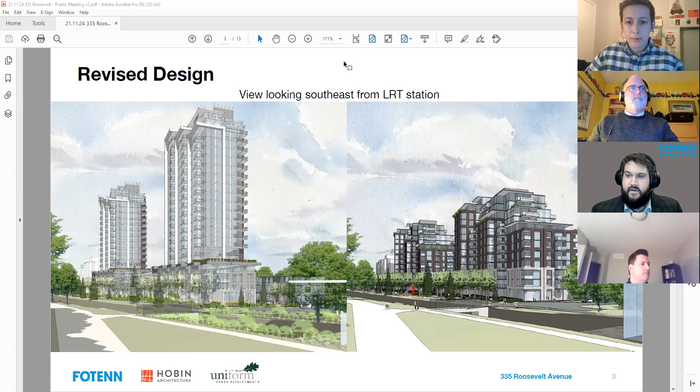So this is a view looking southeast from the LRT station that shows the difference between the original proposal on the left and the new proposal on the right. The former proposal had a building height of 21 and 18 stories. The revised proposal is two equally heighted buildings of 12 and 12 stories.

Hobin Architecture will go over this in more detail, but we previously employed more of a podium tower type design, where you had a strong ground oriented podium of about 3 to 4 stories followed by a tower above that, reaching 18 and 21 stories. The revised design is more akin to what we would call a bar building, which is a shorter, squatter type building, significantly less tall than the previous proposal.

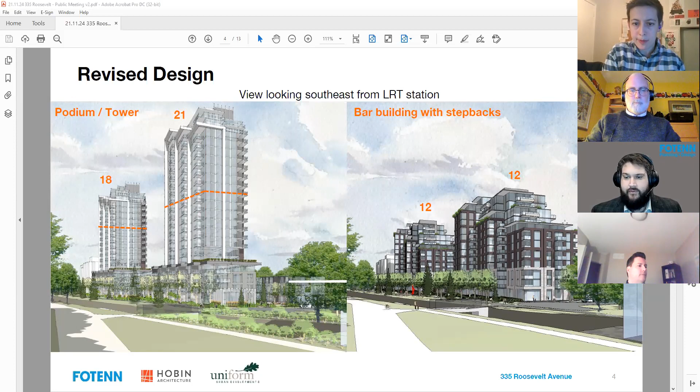We include further step backs at the 7th, 8th, 9th, and 10th stories in order to create a cascading effect with respect to the upper stories. From a side profile elevation perspective, you can see a significant reduction in building height from the previous taller building, which was 21 stories, to now two very similar, though not exactly identical, buildings of 12 stories.

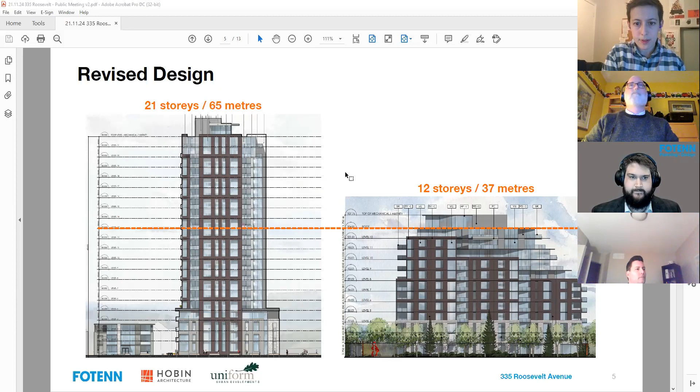As part of the redesign of the building, there came a change to certain key statistics as part of the application: an increase in the footprint of about 12%, as a reduction of the overall building height, as I mentioned, from a podium tower design to more of a bar building design. The buildings get a little bit squatter, and it's an increase of about 12%. That also means an increase in lot coverage of about 5%.

Walking quickly through some of the perspectives. Once again, this is an aerial view looking northwest across the site. Former proposal on the left, new proposal on the right. You'll also notice a change to some of the ground oriented buildings, along Wilmont and Winston, and on the back on Roosevelt as well.

We have these, what we're calling, inspired by the 613 flats model — essentially 3-story, 6-unit, low-rise residential developments. One of those buildings was removed as part of the proposed redesign, but 3 of the buildings will remain.

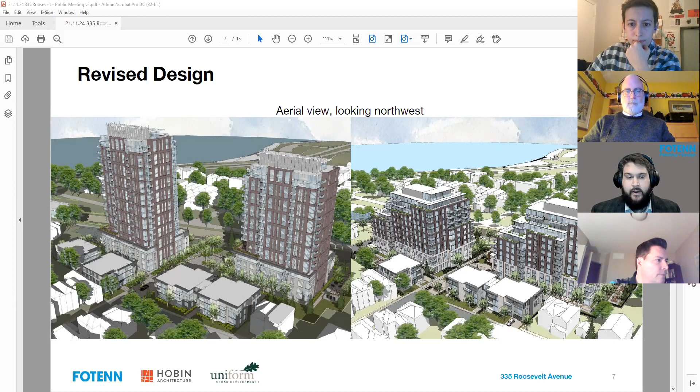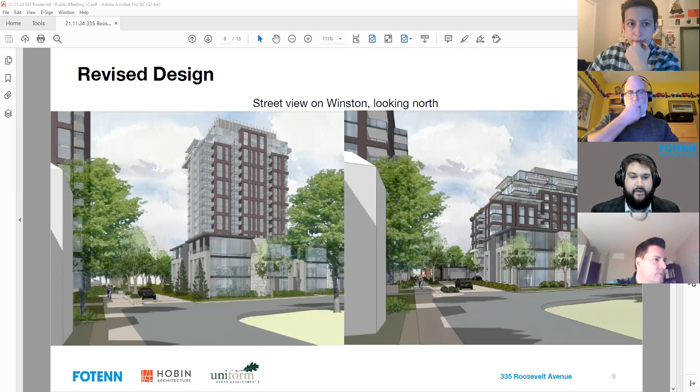This is another perspective on Winston, looking north, showing the aforementioned low-rise buildings that were discussed, as well as the revised eastern building. This is another perspective showing the aerial view of the mid-block connection, providing access through the site connections to the MUP as well as the residential community to the south.

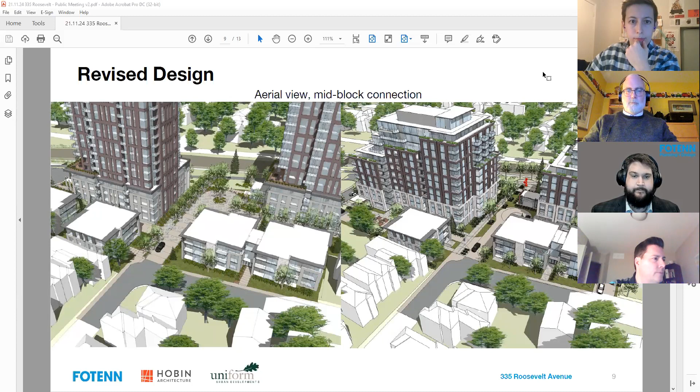To speak to the purpose of the applications, as a recap: the official plan amendment is to amend Schedule C2 of the secondary plan, which permits a maximum building height of 8 stories, whereas the subject proposal is for 12 stories. Subsequently, the zoning bylaw amendment seeks to change the zoning on the site from R3 and R5B to a straight R5B zone with a site-specific exception.

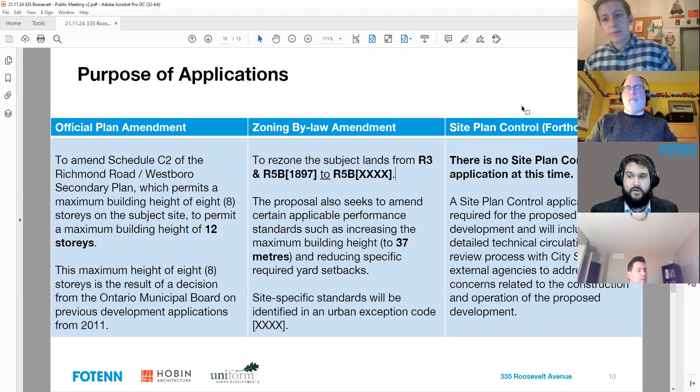This would essentially increase the maximum building height as proposed to 37 meters, corresponding with the 12-story proposed building height. There are other site-specific standards that will be identified through an urban exception code, such as certain reduced yard setbacks. The third application in line would be a site plan control application. There is no existing site plan control application forthcoming at this time, but there will be a future application should this set of applications proceed and receive approval.

To speak briefly with respect to the policy context, a lot of the comments we received were about what has changed since the previous application, which was submitted in 2011 and eventually settled by the Ontario Municipal Board. So we have this slide that shows the previous application would have been submitted under the 2005 PPS context, and it's a little bit different.

These sections and policies do change and get updated every 5 years. But you can see there's been a change in the frequency of key terms such as transit intensification. You're seeing certain policies updated to promote more intensification next to transit stations. This is just an overall summary of that change from 2005 to 2014 to the newest PPS from 2020, which is the PPS that applies to this prospective development.

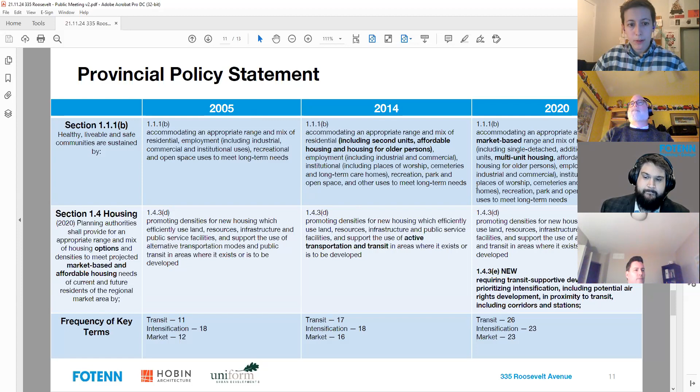With respect to the official plan, this application was submitted in 2020 under the current official plan, but we wanted to walk through briefly some of the changes as part of the 2021 council approved document from October. Overall, we're seeing a direction towards more intensification and a diversity of housing options in neighborhoods and other communities.

There are also policies specifically under section 6.3.1 that speak to allowing higher densities and permitted heights adjacent to rapid transit stations. Similar to the current context where we argue that the proposal supports transit supportive and transit oriented development adjacent to Kitchissippi Transit Station, under the new official plan it's a similar policy context, but it actually provides a bit of a different direction.

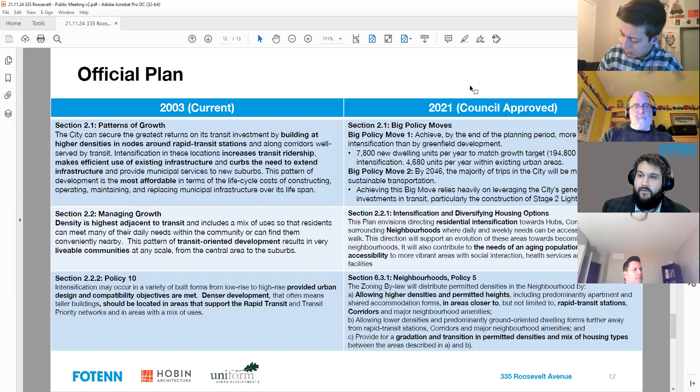This is a council approved document going to the ministry, but we did get some questions about the state of this application with respect to the current and council approved versions of the official plan, so we wanted to provide a brief overview in that respect.

I'm now going to turn it over to Rael Labelle from Hobin Architecture, who is going to provide us with a brief design presentation as well as a short video.

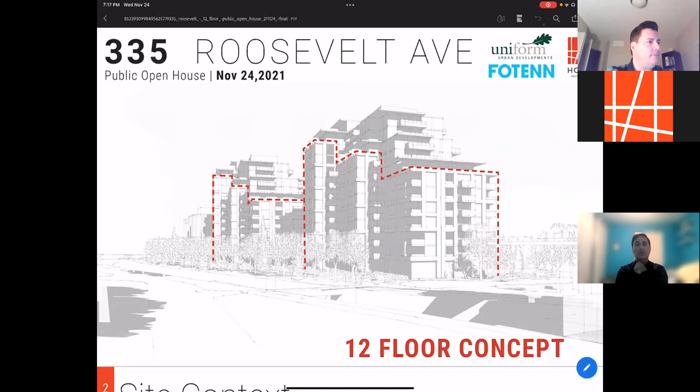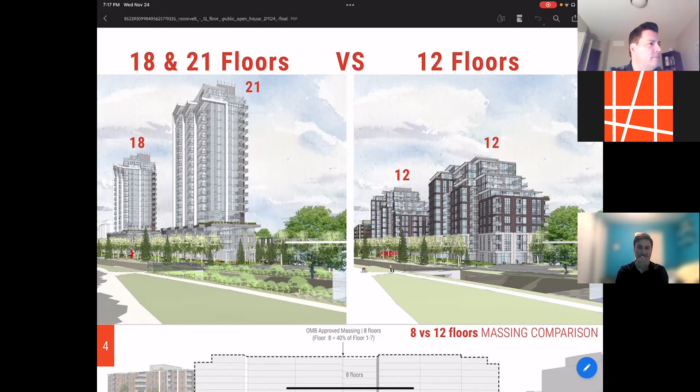As Jacob mentioned before, we are moving from an 18 and 21 story building to a 12-story building that has significant architectural language allowing it to transition down to the lower neighborhood, all the while keeping some reference to a benchmark framework that was established by the OMB.

The next slide looks at an OMB approved massing of 8 floors at the very top, that spans essentially from the westernmost setback to the easternmost setback requirements of the site.

Our proposed scheme looks at taking away the center portion of the site, extending Willmont through the site, as well as shortening the overall footprints of these buildings so that we have a gap between the existing 7-story building to the east, as well as significant building step backs that step the building height down from its uppermost 12-story towards the public realm along the gap we're creating along Willmont, as well as the existing street on Roosevelt to the west.

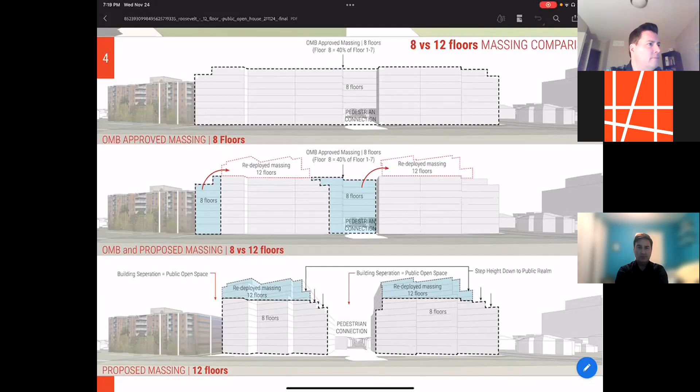The idea is to redeploy that massing we're removing from the center and eastern portion of the site, and position it over on top with some architectural detailing that allows this mass to recede as you extend up. This is intended to provide access to the sky plane, as well as bringing porosity to the site for surrounding neighborhoods.

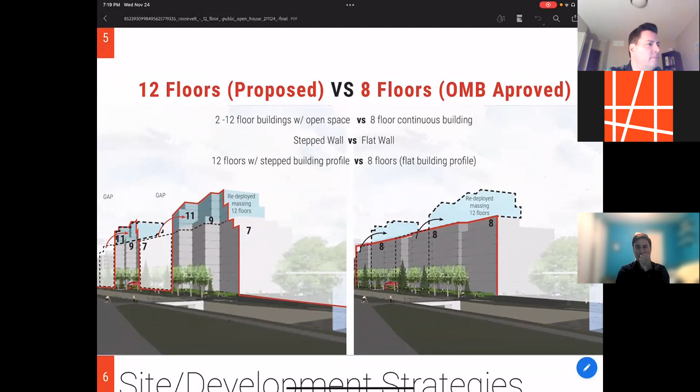This slide looks at that stepping. On the right, there's the bar building that is essentially 8 stories, a continuous bar with a pass-through that would be 2 floors along Willmont to allow pedestrians to connect through, versus what we're proposing on the left, which looks at creating stepping starting at 7 floors, 9 floors, and 11 floors, all the way towards the gap at the center of the site, and then restarting again at 7, 9, and 11.

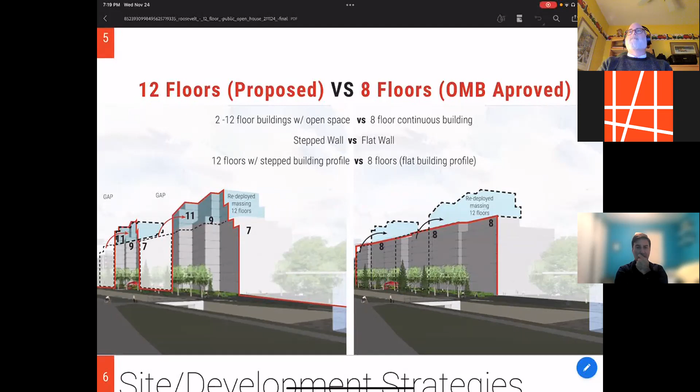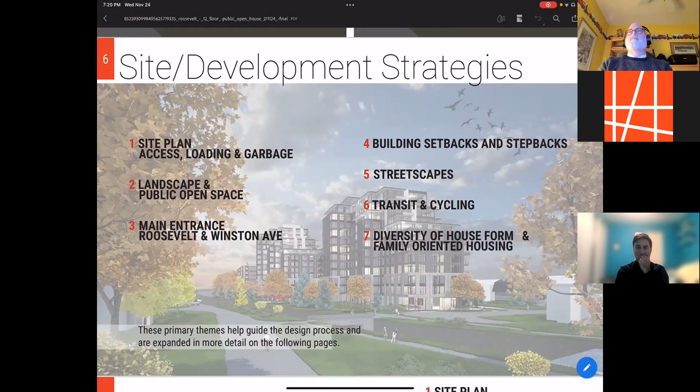So really preserving or reducing as much of the mass of the building as possible and creating openness surrounding the site. Some of the site development strategies, I'm going to look at 7 points, and I'll go through these in detail, and we can revisit them in the question period. Essentially these help to shape the design of the entire site.

I mentioned before, we've got now two 12-story buildings, the east and west, and everything to the south of the development is a low-rise wood frame component that helps to transition the development to the existing low-rise neighborhood.

The ground plane is predominantly occupied by 70% open space consisting of landscape. This creates a really interesting interface between the existing neighborhood and the development. What we've done is pull the vehicles off the street into the site for loading, garbage pickup, and move in, move out, so these larger vehicles are not seen from the residential streets. Our residential lobbies are strategically located, one on Roosevelt and the other as part of the extension of Winston.

This allows the buildings to have very prominent entrance features, as well as you can see the blue pedestrian lines cutting through the site. This entire development is predominantly pedestrian oriented versus vehicular oriented.

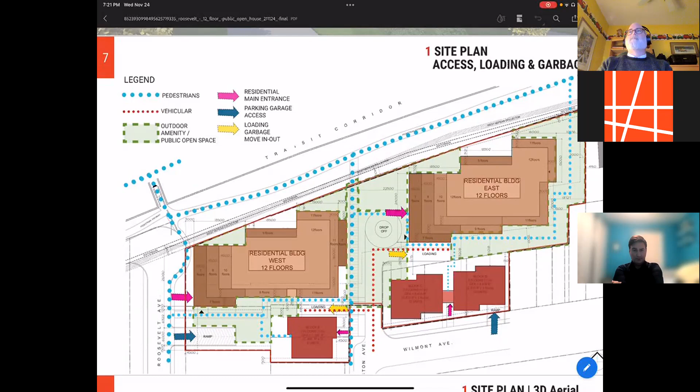There are parking ramps that take you down on Roosevelt at the bottom left, taking the car off the street to underground parking. There's another parking ramp on Wilmont which tucks underneath one of the low-rise buildings, again removing cars from the street. This project is going to encourage visitor parking with a large capacity, so there are fewer cars within the existing neighborhood, pulling all of the cars from surface to below grade.

This is another 3D animated slide that describes what I've just talked about, with emphasis on the entrances to the residential buildings, which are highlighted in pink.

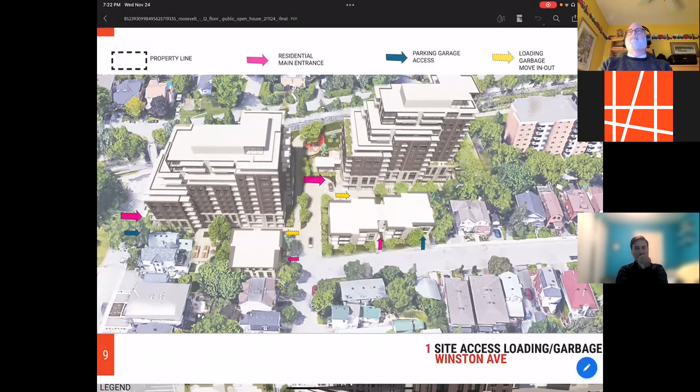Next slide looks at that connection on Winston through the site, pedestrian focused, with a public art feature at the very end at the crossroads between the MUP and that pedestrian connection.

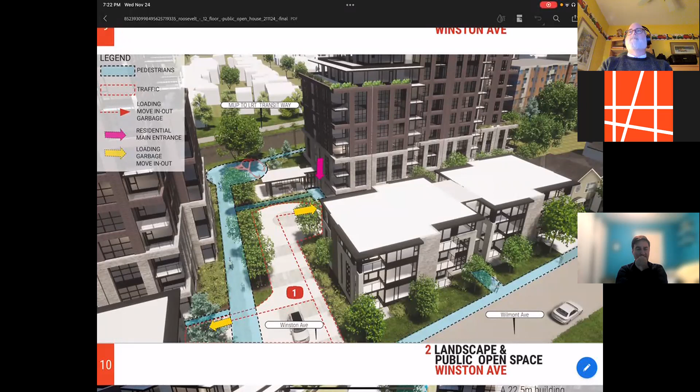You can see in the yellow arrows where we've identified the loading access points, again removing the trucks from the street. Our residential access point for the east building is located at the very heart of the site, promoting that diversity of public and private connection.

The landscape public open space, looking at it from the north, extends through the site. At the bottom of the page, you can see the connection of the crossroads between the MUP and Winston Avenue, the pedestrian link cutting through there. We've animated this space with a small, low-rise residential lobby which projects out and starts to shape your pedestrian experience as you come through, but predominantly dominated by landscape and trees.

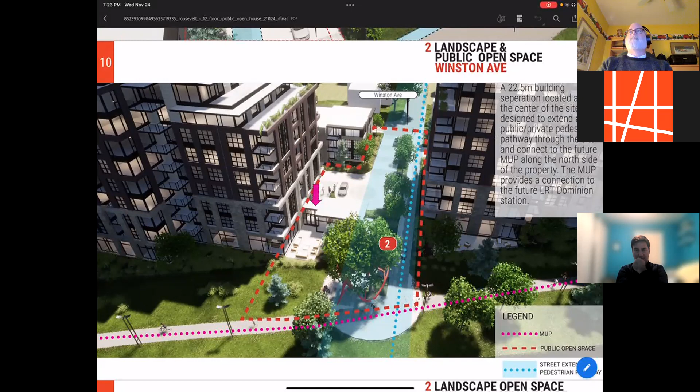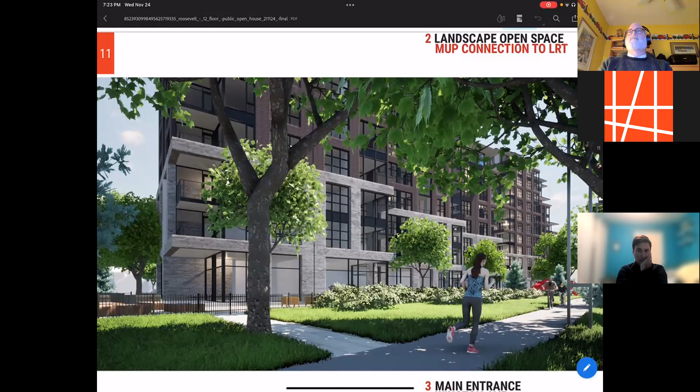Which brings me to the next slide, landscape open space. This is an image taken from the northern part of the site along the MUP. You can see the articulation of the building, how it's broken down in terms of materiality, setting up a 3-story datum line that creates your foreground experience as a pedestrian. That entire ground plane is animated with amenity spaces, active throughout the year.

Main entrance on Winston. This is a view looking north on Winston, and you can see at the very end the public art feature, the street trees extending through the site, as well as a small low-rise pop-up residential lobby that punches through.

What's really important and valuable here is to start to see how the red brick stepping of the building starts to rise up, and also the sky plane, which is completely visible from the residential neighborhood to the south.

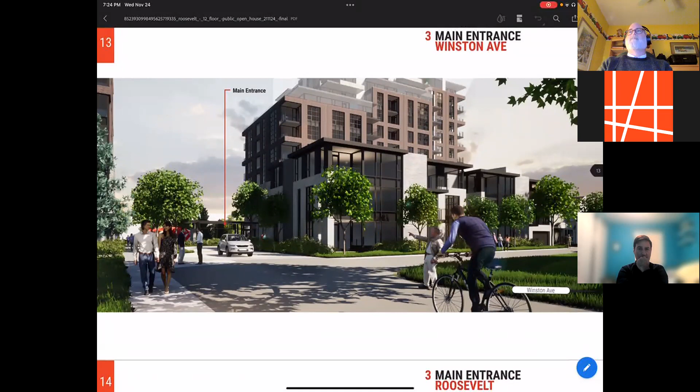This is another view as you get a little closer towards Willmont and Winston. You can see how the low-rise residential component along Willmont starts to extend and relate to the existing residential neighborhood to the east, while creating a significant step back of the buildings to the north. You can see the main entrance component, which still has a presence through the gap of the site.

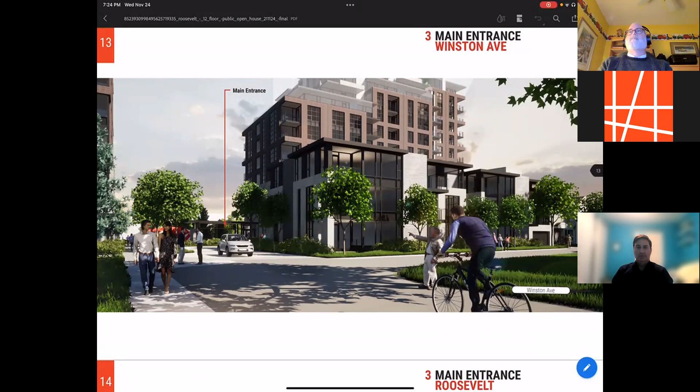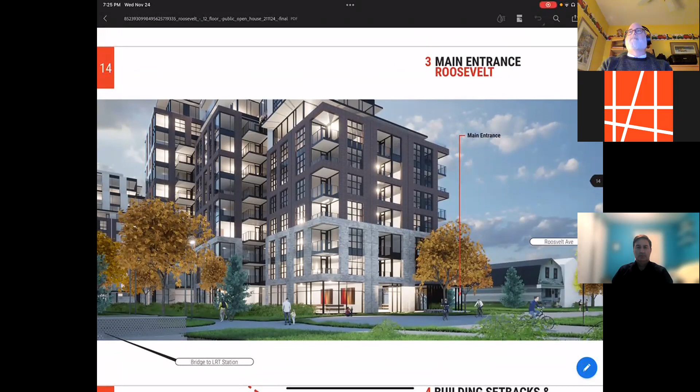You can start to see the significant step, the setback between the building and the neighboring residential property to the south. This is another view a little further on Roosevelt, standing in front of this empty lot where we removed the low-rise component.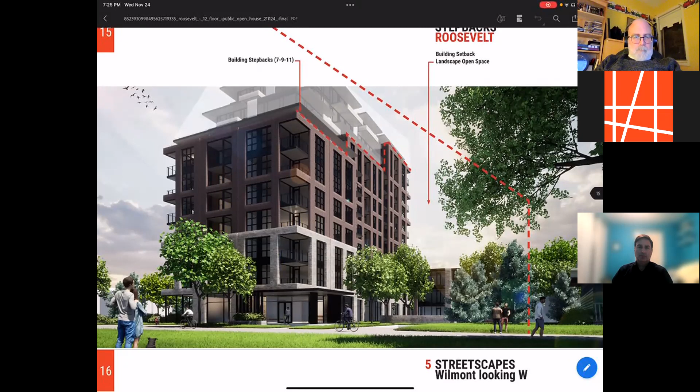We have a parking ramp access here, as well as some outdoor amenity space. Again, a significant setback between the existing residential neighborhood and the building, all the while emphasizing the breakdown of the mass of the high-rise rising up from 7, 9, and 11 floors with a significant building step back at the very top.

This is a view down on Wilmont, looking west in this case, standing in front of what will be the transition piece between the existing residential neighborhood and the new proposed low-rise buildings. Again, an extension of building height throughout the street allows that to be the shaper of this development, with the high-rise buildings falling away in the background.

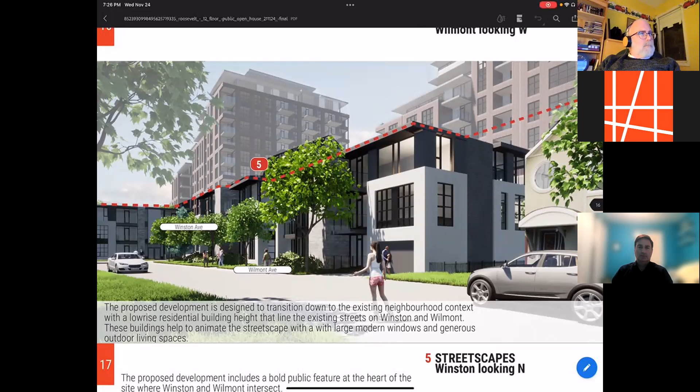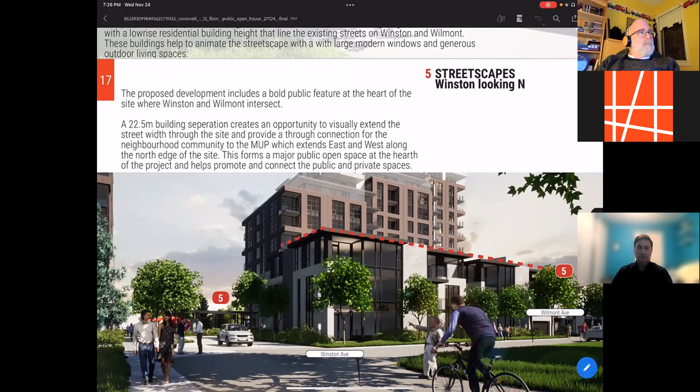This is another slide that speaks to streetscape on Winston, looking north. This is again about the diversity of housing type, creating a strong datum line along those residential streets that relates to the height and scale of that neighborhood.

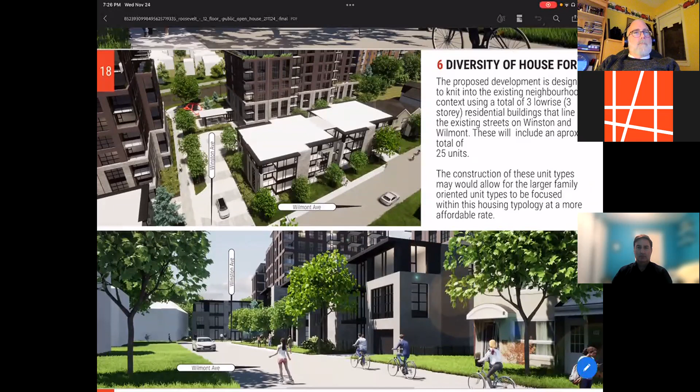The diversity of housing form in this case is intended to attract larger family-oriented unit types to be focused within this housing typology, and perhaps providing a more affordable rate because of its wood frame construction type.

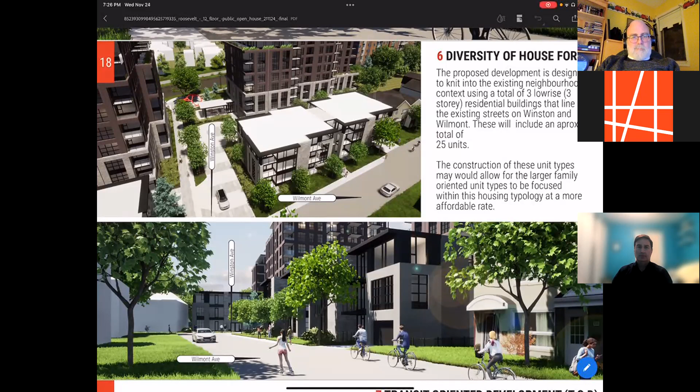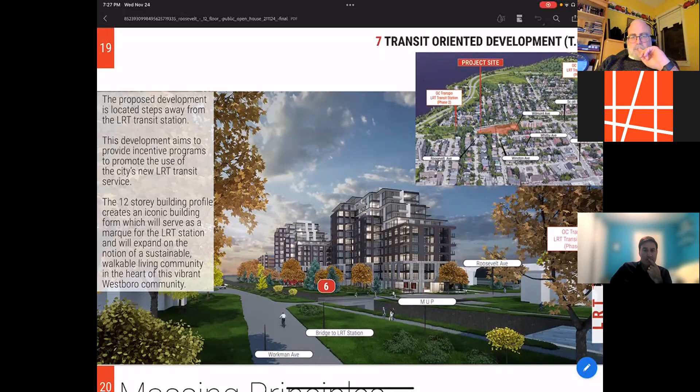And again, this is the transit-oriented development view. So to the right, we have the LRT, the new Dominion station location, and proximity to the bridge, the pedestrian bridge that will link and connect you to the MUP that will span east-west along the front northern part of this development.

So just to go into some of the massing principles and how we've looked at articulating the architecture, making sure that we are responding to this being a very delicate approach to design as it relates to building transition, height, and transition for its existing residential neighborhood. So I'll go over these six points in detail.

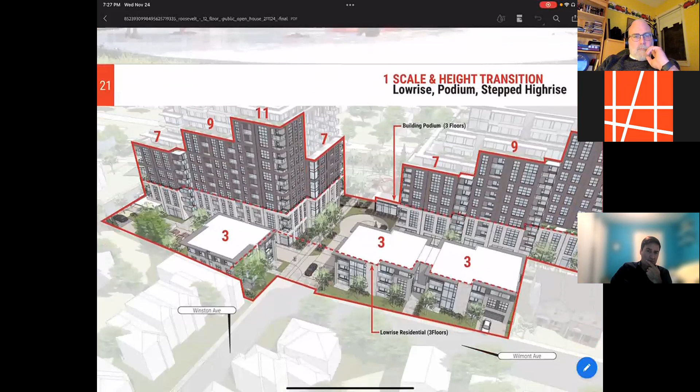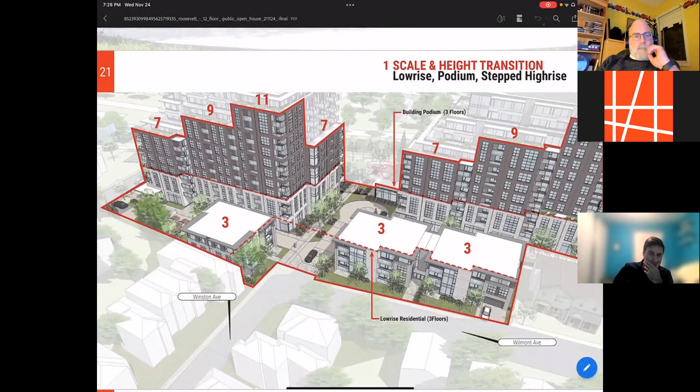This basically is intended to show a diagrammatic breakdown of the mass. This looks at scale and height transition with regards to the low-rise podium that sets up Wilmont and Winston, and creates that building step back for the high-rise component set in behind to the north, also articulated with a 3-story podium edge, as well as a red brick or darker brick mass that steps up from the public realm with 7 stories, and again 9 and 11, with significant building step back and roof terraces that allow this building to really help break down the mass.

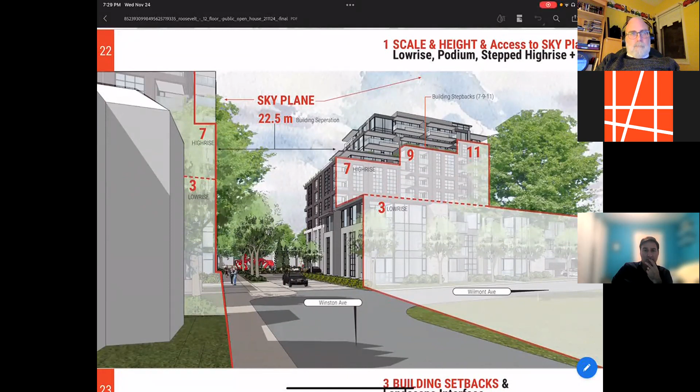This is a slide that speaks to the building setbacks and some of the landscape interfaces, especially when we get into the neighborhood just north of Wilmont. The building footprint itself steps away from the rear lot lines in order to achieve a 10-meter building setback for the high-rise component behind the existing residential buildings.

We were originally in meeting with Steve Gauthier and planning staff, and we have compromised from an old building step back, which was at level 7, bottom right-hand corner, to a new building step back at level 4, which achieves that 10-meter building step back for the high-rise component.

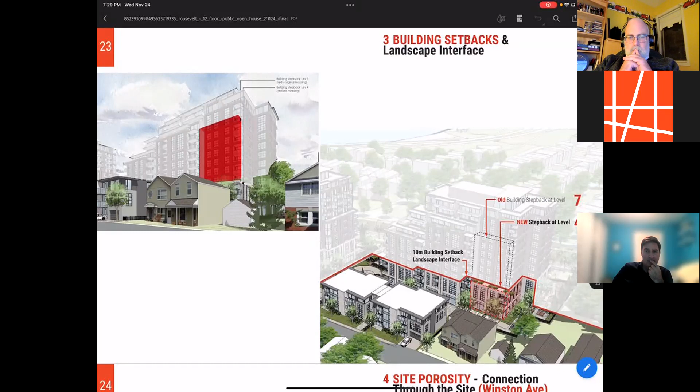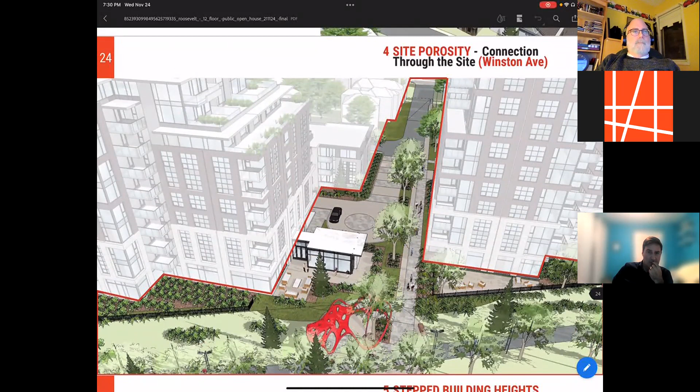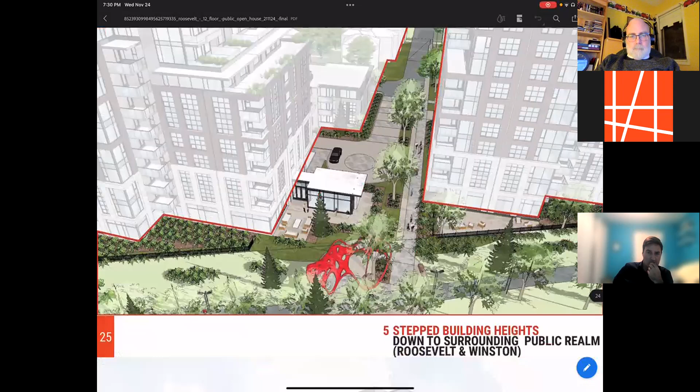The site porosity I spoke about - this slide emphasizes the footprint, the stepping of the footprint to provide more of a landscape interface, as well as the amount of space that exists in the center of the site for the street easement to connect through and be animated by. It's a great opportunity to create a bit of a crossroad feature with public art, which we hope to continue to explore as this project progresses.

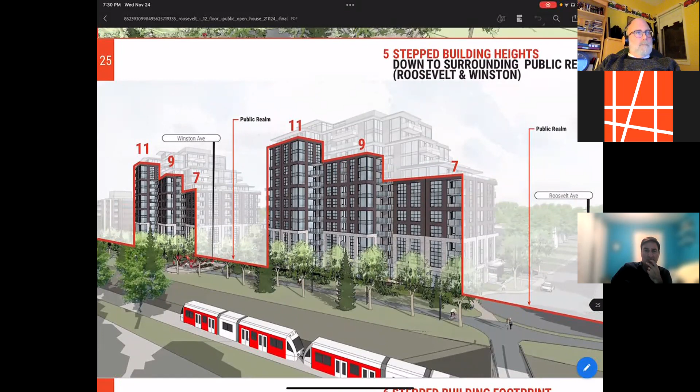Again, the emphasis on these stepped building heights down from Roosevelt up to 7, 9, 11, coming back down at Winston with another relationship to 7, 9, and 11 again - dramatically reducing the length of these buildings, breaking that bar building down into two separate components with a really strong public realm and a larger gap at the center of the site.

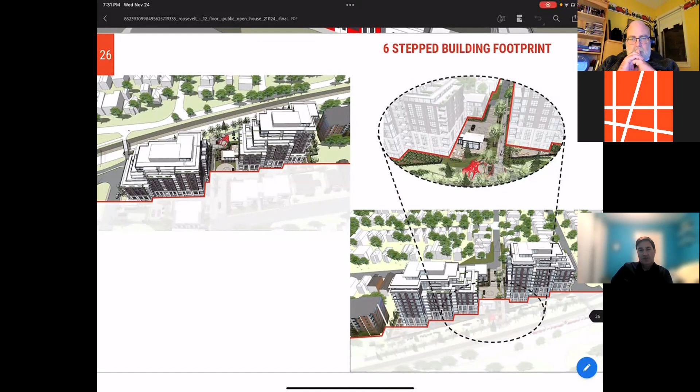Again, this is just another slide to help illustrate the aggressive articulation of the building footprint itself, but also the stepping that happens at grade with the footprint as well as above as the building steps up in height. So it's a very dynamic overall piece of architecture.

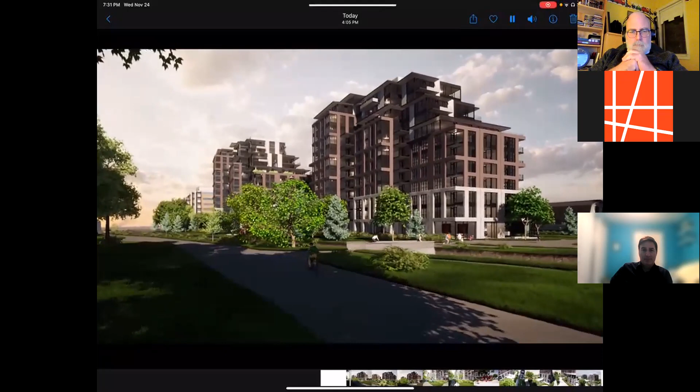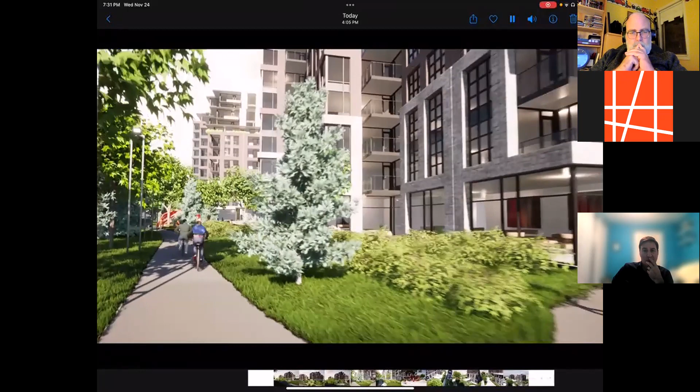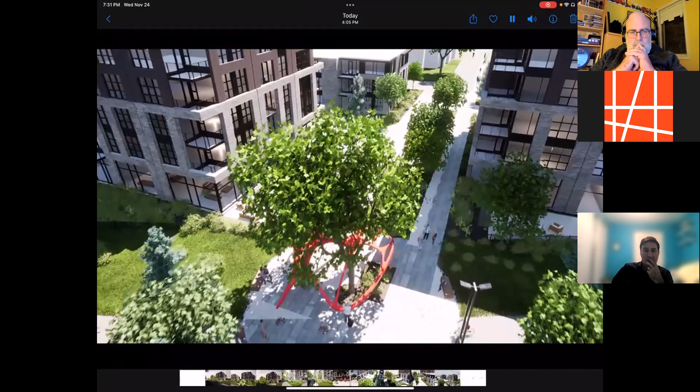So again, that foreground is your pedestrian experience along the MUP. The public realm at the center of the site, the public art piece, the residential podium, the drop-off loop for vehicles to come in and out and down into the parking garage, keeping the cars off of the street. So thank you very much.

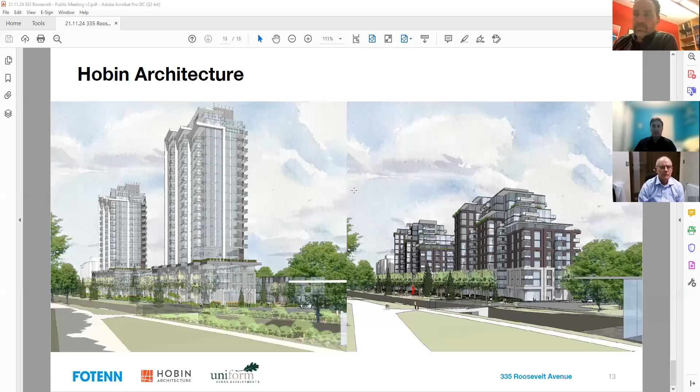I'm happy to jump in. I can share my screen, but Rael might have a better version. On the site plan, there's a parking ramp on the Willmont side, but the main parking ramp is located to the west on Roosevelt. So there are 2 parking accesses for the common underground parking garage. The main ramp is on Roosevelt as it leads to a signalized intersection to the south, but there's a secondary ramp on Willmont as well. So 2 ramps.

There's a couple other questions coming in about the ramp on Willmont. Sue Morris also asks, the ramp on Willmont seems to be new, please confirm that this is for the 2 levels of parking. Yeah, that's a secondary ramp for the existing planned 2-story parking garage.

And maybe to also cover it, Emma Thom asks, why can we not have the cars from the Scott direction, this is a better solution than coming down a residential street. Maybe if you'd like to talk a bit about the rationale for the ramps.

We did originally explore an option for continuation of Scott Street as the main vehicular entrance to the property. We explored it with our project team as well as with staff, and it was determined that due to the location of the multi-use pathway and other elements, extension of Scott Street through a private driveway or easement would not work for multiple reasons. So we had to seek a secondary plan, another option, which included an access on Roosevelt. And as part of this plan, there's an additional ramp on Willmont.

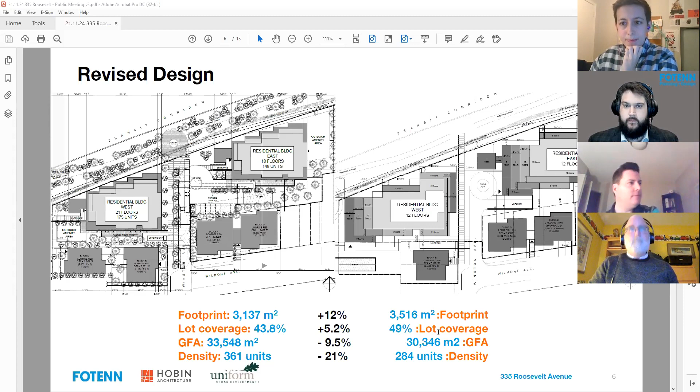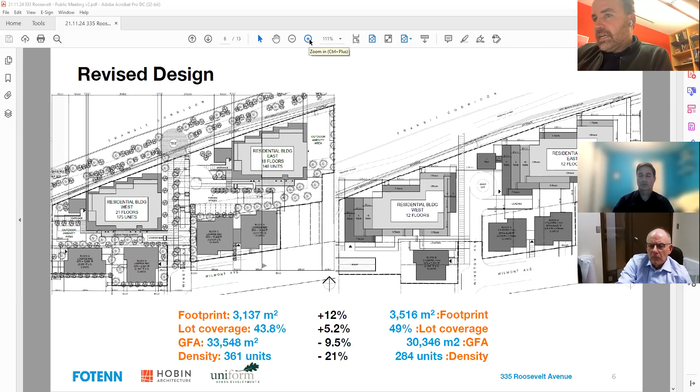I think, yes, it is necessary. We feel that what we've done, if you look at the site plan on the right, is scale back that one-story building approximately 2.5 meters so it now aligns with the property line, which is the street easement to the left of Block C. This creates a clear extension of the street through the site as it relates to that easement. Great question, I think it's more obvious in the visuals I demonstrated, and I'm happy to bring those up if there are further questions.

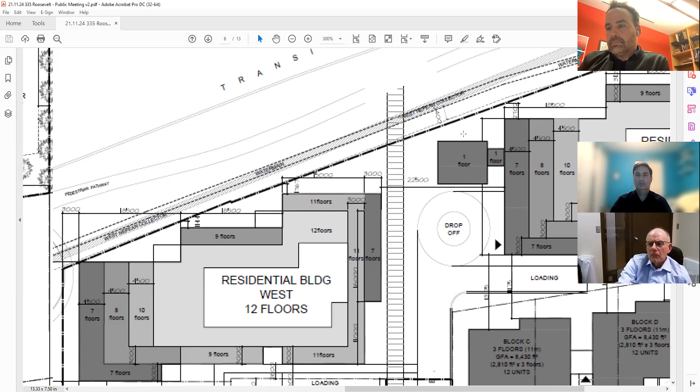Just to add to Real's response, regarding the ground floor amenity space for residents, there's a principle called 'all eyes on the street' that we use in planning. Adjacent to walkways or public open spaces, it's good to have active uses there, like a gym or other amenity with glass windows, allowing interactivity between residents and pedestrians crossing the space. This makes it safer for everyone, since there are people around and doing things. It's a CPTED principle, crime prevention through environmental design, that we sometimes apply in planning, so it does have a function as well.

Just to add one more thing, it's good that this question was raised, because there's this idea of crossing the threshold and feeling like this may not be public space. That's another reason the ground level is animated with over 80% amenity space and not private units, because it allows this to feel active, very much like a traditional main street with shops and boutiques. So it is animated, as Jacob pointed out, with amenity space.

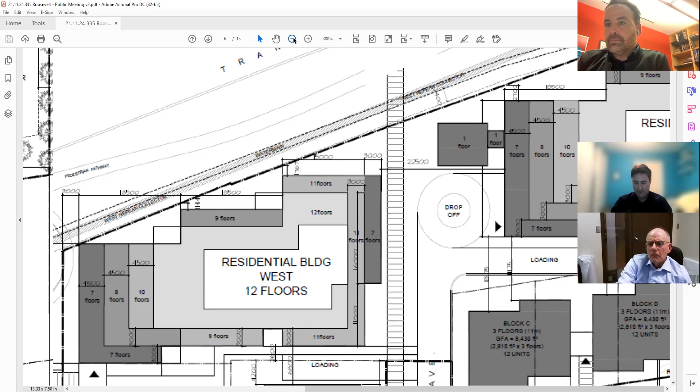I'll say I agree entirely with you, and I've raised this with the developer as well. I would prefer to see that impediment removed from the free view through the space. I've asked them to try to remove it, and I will continue to lobby staff to push back at the developer and then council. So I don't consider it settled at this point.

Perhaps to jump off your point, Real, I'll move to a question from Emma Tom, who asks: will there be any commercial units at the ground level, or is that being looked into at this point?

No commercial units. Amenity space is the predominant use at the ground level, and it's mainly to serve the building, not public amenity. It's really just private amenity spaces. Awesome, thank you.

Moving to the next question from Robert Husson, who asks: the original density was at 194 in the previous proposal, and now it is 284. Any explanation for the increase?

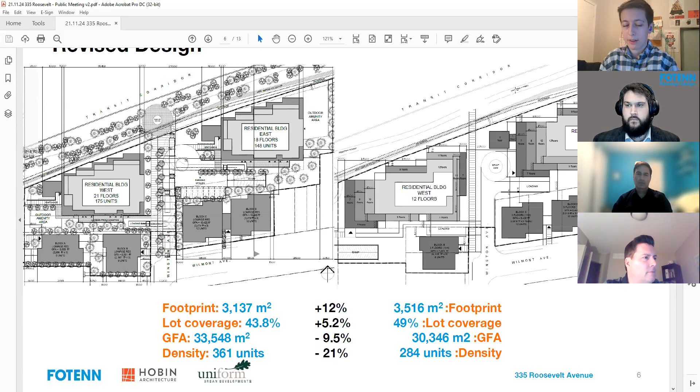We take that as feedback as well, but if anyone would like to comment or give more information on that right-of-way, feel free. I'll just say this has been a discussion for a number of years, and I've looked into it with the city's legal teams. This is entirely privately owned property, and the city has no easements over any of it. So there is no right-of-way that exists there. But we are all insisting, I think, that the developer honor their commitment to maintain access through the middle of the site to connect to the Roosevelt Bridge. It's just not backed up by a formal agreement that exists anywhere.

Thanks, Jeff. I'm sorry, other than the OMB decision, I think that enshrined that as well, didn't it? That there must be that right-of-way, or sorry, not right-of-way, that there must be that passage. I can't say so for sure. I'll leave it there. Well, I believe there was some language related to it, yes. And we've got time to look into that if need be.

To go on to the next question from David Mowbray, who asks: is this intended to be condominium or rental units? If that's something that could be answered at this point in time. Yeah, it's intended to be rental.

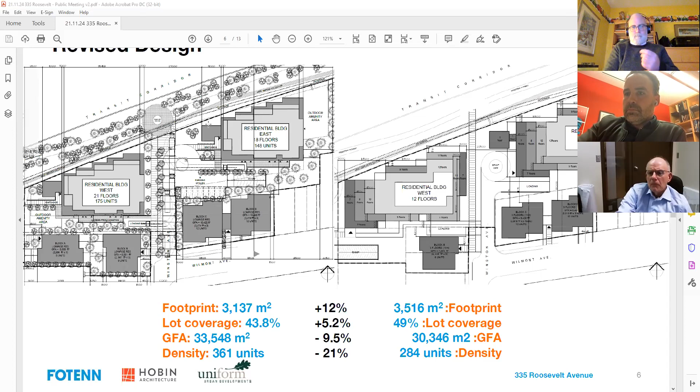And the policies of the secondary plan generally speak to the fact that they acknowledge that the greater opportunities for intensification and high-rise building heights are going to be located next to Westboro Transit Station. And recent approvals and applications do demonstrate that. We're seeing 30+ story buildings and 25s in that area.

So Westboro is definitely a different transit context, but it doesn't mean... the secondary plan specifies that Kitchissippi has more limited potential than Westboro Station. And we think that this proposal reflects that. We're not coming in with a 30-story tower and saying this is very similar to Westboro.

We're in the same sector. It's the same area under the secondary plan and so on. We're acknowledging that there's a bit of an undulation as you go through the various LRT stations. More major stations will have more heights, more neighborhood-oriented stations will have lower heights. And we think this 12-story proposal reflects that.

So we do recognize that Kitchissippi Station is not Westboro Station, and we're not proposing the kind of heights that are being proposed and approved near Westboro Station. We think 12 stories is entirely appropriate for a transit station such as Kitchissippi.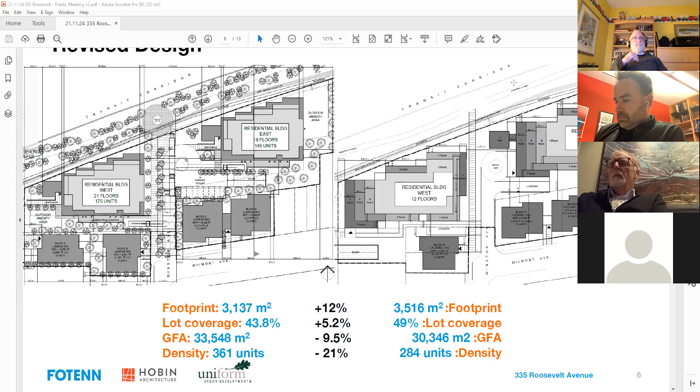I've been asked to speak for the Westboro Beach Community Association, which is against this proposal for the simple reason that it is too tall for the neighborhood. And it should conform to the plan.

We don't believe that, and it's interesting to point out that the plan, both in its old form and its new form—so the clergy principle doesn't matter one way or another—set a height maximum on this specific site for 8 stories. This is 50% taller than that.

And the policy rationale contained within the secondary plan is that this is a low-rise neighborhood. It's a very clear statement of how each of the diversity of neighborhoods in Ottawa is clearly laid out in the secondary plan. The secondary plan is the site-specific application of the general planning principles. So in this case, it's important to remember that the specific rule overrides the general.

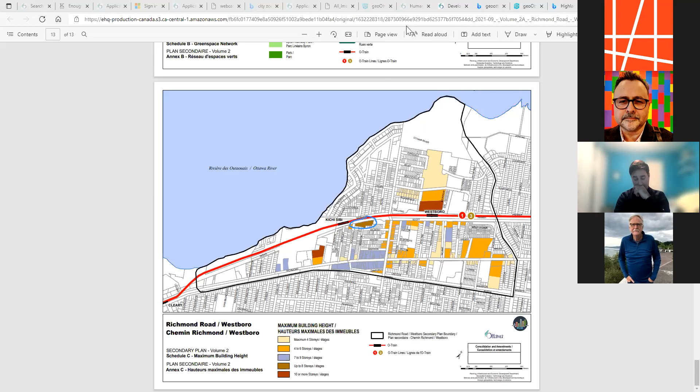Yes, really thanks, I would love to respond to that. I don't think it's fair to characterize FOTENN's assessment of the policies as cherry picking, because at the end of the day, there's a Planning Act opportunity at any point in time prescribed to allow for official plan amendments and secondary plan amendments. And fundamentally, when a planner looks at that, they have to look at the overarching policy references.

So we would look at the official plan, both the old and the new, and we would look at the provincial policy statement to give us guidance on that. And as Jacob pointed out, there's been some pretty significant changes since the OMB hearing in those particular policy areas that are the backbone upon which we rationalize the increased height.

And I think to say that the city's newest official plan and the adoption of the secondary plan undertook the type of analysis that's inferred there is wrong. You can look at the entire Scott Street corridor on that map and see that the 4 and 6 policy framework that's shown there hasn't been updated, despite the fact that the city has approved 25 and 30-story buildings.